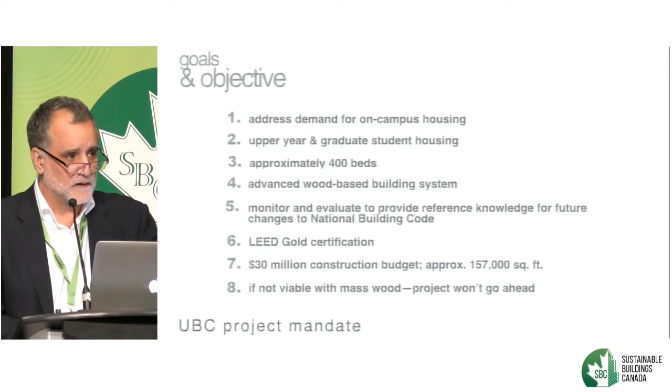And finally, it was stated that if it was not viable to build with mass wood, that would be okay, because that would just be a conclusion of a due process, and so then the project just wouldn't go ahead in wood. But the university had built 18-story concrete slab student residences. They've done 4 or 5 before Brock Commons, and so they would just build another one of those. So like I like to say, no pressure, no pressure at all.

This is an excerpt from an email back in August of 2014 when we were deciding whether we would even pursue the project. And even back then, before we'd even submitted our response to the EOI, our thinking was to develop an approach that would lessen problems rather than create them. Put a bunch of architects and engineers together, and invariably they make things much more complex than they really need to be.

We felt that a hybrid structure with concrete components was the way to go. We've just seen on projects around the world that they seem to be more favored by the approvals authorities. And even here you can see, even though we thought that some exposed wood might be nice, we recognized that schedule, cost, fire protection, and acoustical considerations would have to take precedence over the aesthetics.

This was underscored by this very, very tight construction budget we were given, which at the time worked out to only $191 per square foot. But on a quick study, we knew this was lowballed, just to drive down the fees. It wound up coming in at about $235 a square foot, versus a comparable concrete student residence which would have been, say, about $210. So $235, pretty impressive number. I've been at a few mass wood presentations, and no one ever talks about the cost, and that's because we're proud of the cost. Everyone else's costs that I hear behind the scenes, it's twice that or more.

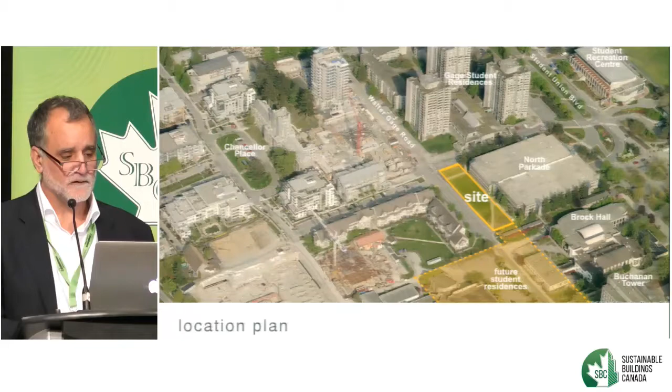So Brock Commons is located in the campus core district of the University of British Columbia. Even though it shows up as a green site, there was a bunch of temporary classroom portables that had to be removed. You can see they didn't give us much of a site, right beside a parkade. And when I say not much of a site, I mean physically it wasn't much of a site, in that the building didn't even fit on the site. We had to take over a bit of the roadway there. There used to be straight-in perpendicular parking across the street there.

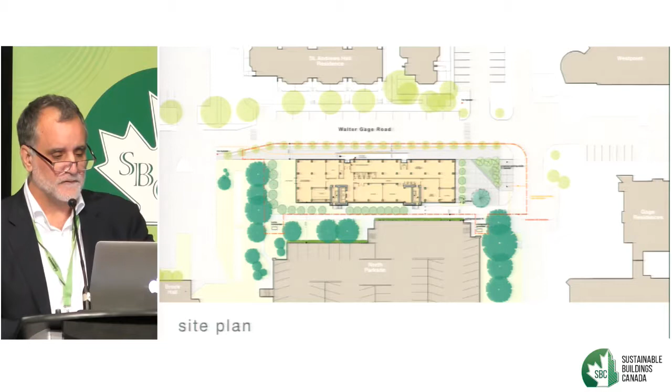We went through this study and analysis, and the client just couldn't think of why they really needed to go to the time and expense of constructing a basement.

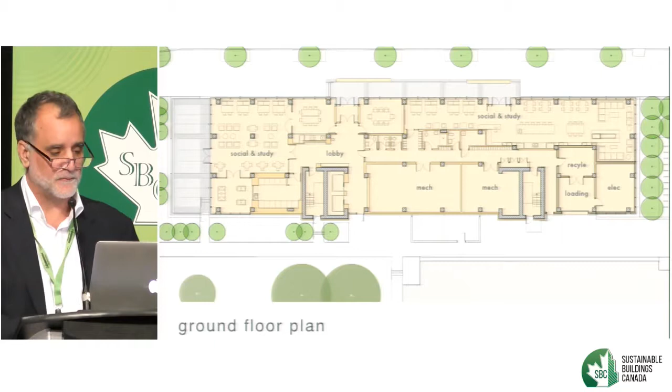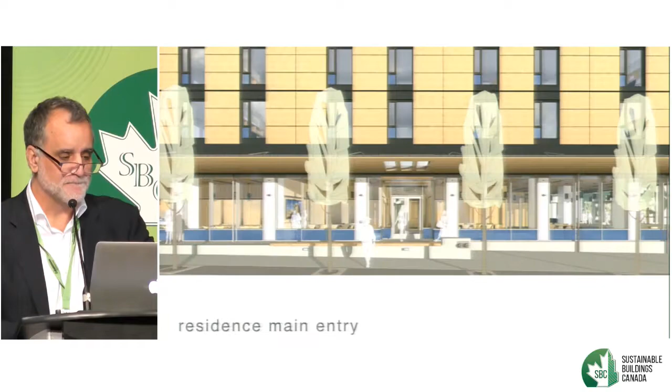So the form and massing features a rhythm of vertical striations with a CLT canopy at the base and a cornice crown up at the top. There's a view of the public realm and the main entry to the student residence.

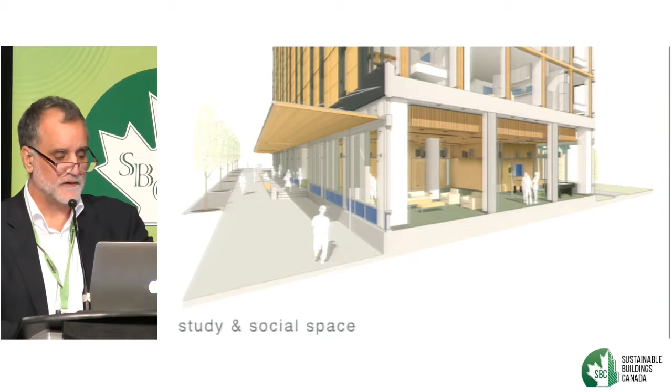This section shows an extensive 58-meter long CLT canopy that runs along the front of the building, and you're getting a view here into the social and amenity space for the students. There's a view into the quad units at each end of the floor plate.

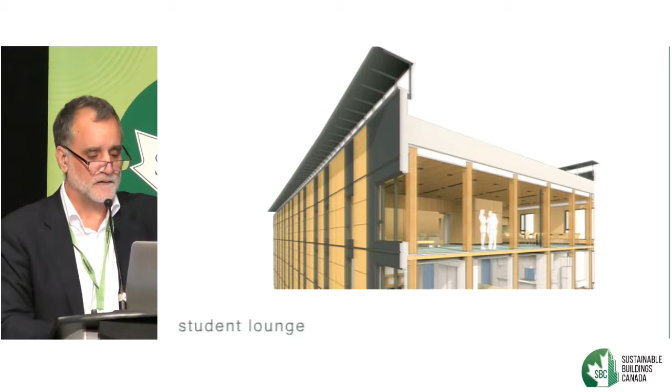And up at the top, we used one of these quad units on the 18th floor where, because the building code allows it, we exposed the structure there just for demonstration purposes.

On to some technical considerations, and again, just the overriding approach was to keep it simple.

In terms of the challenge, I have to say the most important challenge was securing an approval from the provincial authority to actually build the project.

This was the handout at the first meeting I attended with the provincial authority about the process they wanted us to go through to assure them that this project was meeting their standards, which required that we obtain a site-specific regulation from them. A site-specific regulation specifies what requirements in the building code wouldn't apply, and then it replaces them with substitute requirements. But rather than following this long and winding path envisioned by the authority, our approach was just to make the process as simple and direct as possible.

And I think we kind of surprised them on that. They're not used to that, I think.

But they did want to complicate things by requiring that we present the project to two expert panels comprised of a mere 20 experts on each panel—one expert panel for fire and the other for structure—and their role was to advise the authority whether the technical risks for the project were deemed acceptable.

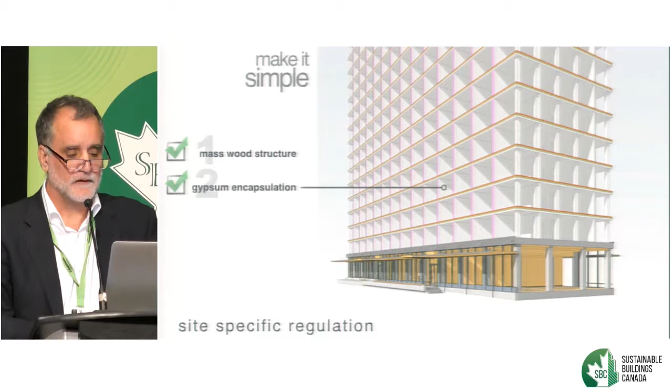And the third was use of an exposed CLT canopy, which actually we didn't have to ask—we just thought it would be nice to ask them because we were sprinklering it anyway, so it's permitted by code, but we thought they might be worried about it because of the wood up above.

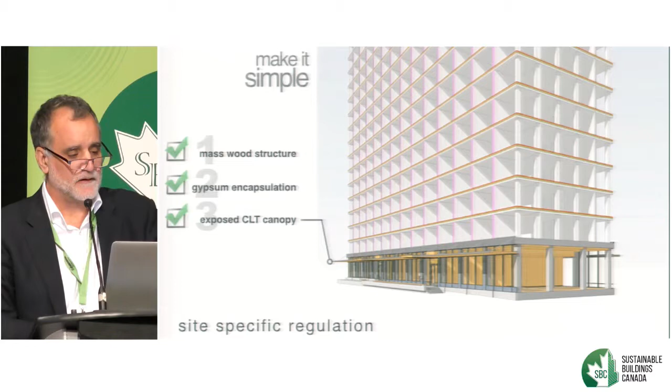So really the key thing here was that it was for reasons of cost, fire protection, and the approvals process. We had a very, very tight constraint on this: that the wood structure would be encapsulated with gypsum board completely to achieve that approval.

And the schedule did not permit time for any testing of new fire assemblies, so this is why we had to rely on known fire protection systems and the qualities of gypsum board. Even though we had a thicker than required CLT slab, for example, where we could have taken advantage of some char in our calculations, we didn't want to confuse the authority.

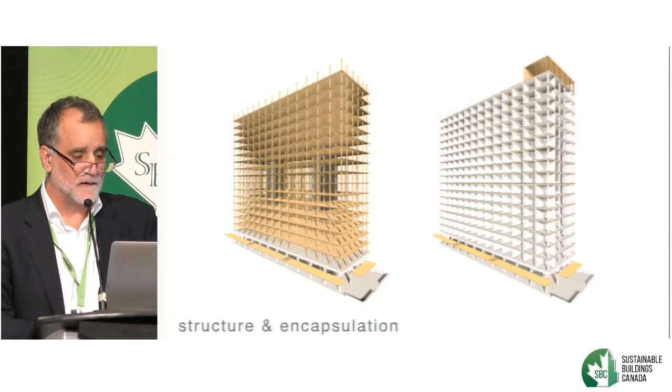This strategy was very successful, as the province issued the site-specific regulation just 3 months after our presentation to the expert advisory panel. They admitted that's certainly a record.

We used a hybrid structural system of concrete, wood, and steel. The first level and the two cores are concrete, above which are 17 floors of wood columns and CLT panels. Steel drag straps transfer seismic forces from the CLT to the concrete cores. The roof structure is steel, on the recommendation of the building envelope consultant. We had originally designed it in wood, but they advised the client on a belt and suspenders kind of insurance policy, reasoning that with steel there couldn't be any slow leaks. They said roofing membranes fail over time and you just don't know it, and they were concerned a wood roof would be susceptible to membrane leaks.

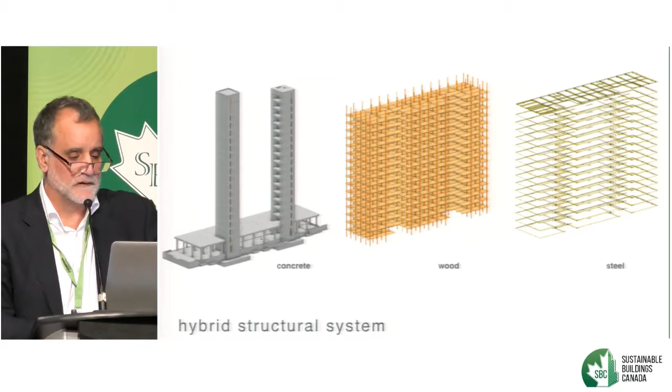The wood structure is made up of a variety of components. The panels measure 2.85 meters wide by 6, 8, 10, and 12 meters in length. We used parallel strand lumber columns at levels 2 through 4 at central locations, due to the higher structural capacity required. The typical glulams are 265 by 265 millimeters from levels 2 through 9, then reduce in size to 265 by 215.

A key feature of this mass wood structure is that no beams are required, due to the use of a two-way span CLT flat plate slab. This had never been done before, having only been used in really small applications on CLT projects, not for a complete floor plate. The beauty of having no beams is that you can distribute services very efficiently. If you have to go through or under beams, that's a big problem.

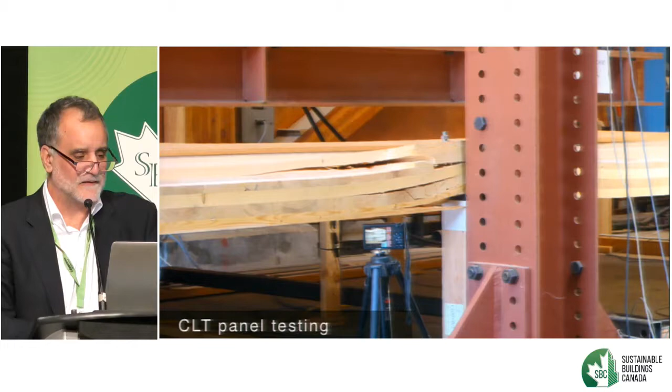This is the steel connector detail that got developed. It's really simple, practical, and economical. The connectors are epoxied onto the glulam columns, and holes in the CLT panels are guided onto 4 threaded steel rods. The upper connector is then slid into the base connector and fastened with just one steel pin. Then a steel cover plate is added, and the panels are bolted into place.

These manufacturing and erection tolerances are very, very tight, just plus or minus 2 millimeters for both the columns and the panels, and they need to be positioned within that same 2 millimeter tolerance. We did develop an all-wood solution for this, but it meant the columns needed to be a bit bigger to support the CLT with the shearing, and there were concerns about the ability to achieve the fire protection required. But we think there's a solution there for the future.

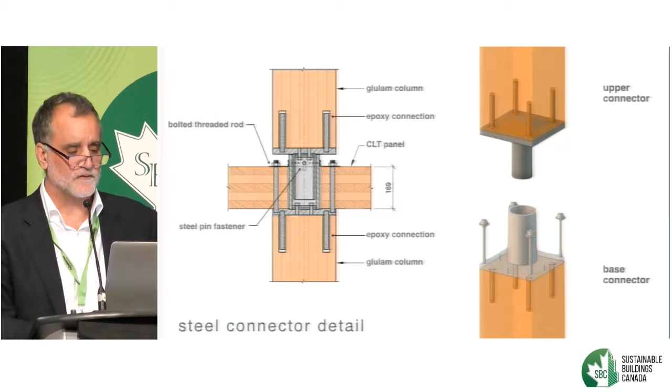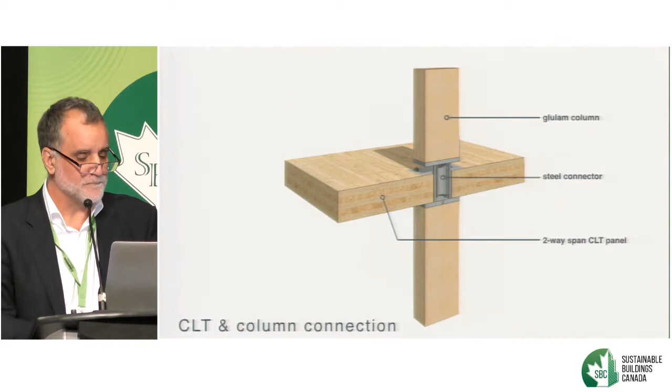Here's a view through the connection after it's assembled. Again, very, very simple. And this shows the final finished assembly after it's all been fitted out.

On to construction, again keeping it simple. Back in July 2015, a full-scale two-story proof of structural concept mock-up was constructed to test the various interfaces between the CLT slabs and the glulam columns, such as the wood-to-wood connections, and to obtain feedback from the installer on the erection process. The details were modified in response to that feedback.

So I said we didn't have to do testing of the assembly. However, we were required to test the fire stop penetrations through the CLT, because there just isn't a lot of information available on that.

So we carried out this test using copper pipe, cast iron, and PEX piping. The fire stop was required to provide 90 minutes of protection, but we ran this test for 2 hours and there was still full protection. We did it for 2 hours because we didn't have an official test, so we wanted to do this unofficial one. After 2 hours, the result was only a slight loss of gypsum board with 0 to 1/4 inch of char at the CLT.

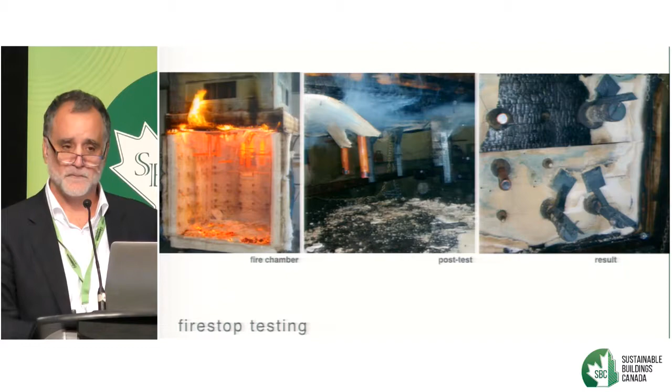Built into this was 29 extra millimeters of wood that we couldn't rely on for char. At the expert panel, the fire science consultant asked one of the guys at the NRC what he thought this assembly would test out at, and he thought 4 to 5 hours. So it's very, very redundant. It's all about getting the approval and getting this mass wood building built so there can be improvements on it in the future.

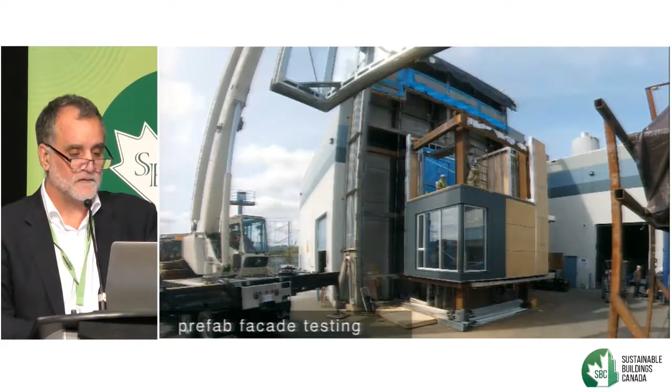We also did mock-ups of the prefab facade. Here you can see them being installed on a steel framework where testing for building movement tolerances and weather tightness was performed. Prefab facades in Vancouver don't really happen, so this was kind of a first again.

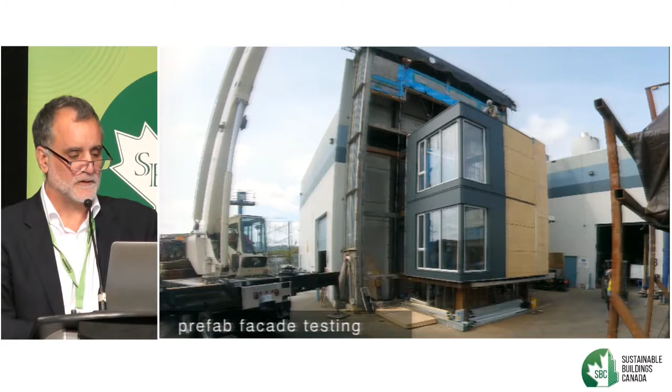Prefab panels required a lot of work with the prefab supplier when they were first testing this. It was taking them about 50 minutes per panel to install. They had to change their system and got it down to less than 10 minutes per panel, even faster once it's positioned in place.

The glulam columns and CLT panels were manufactured in BC by Structurelam.

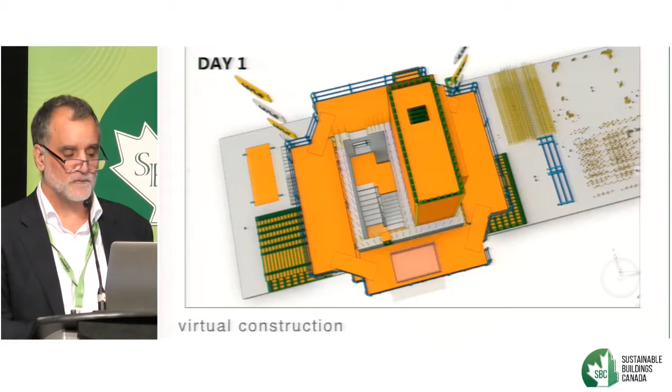Every component was assigned a specific location on the deck, and every step of the process was optimized for speed as well as safety. During construction, the videos were viewed on cell phones by the workers to ensure the proper process was followed. This video shows the optimal sequencing for the wood structure and the facade.

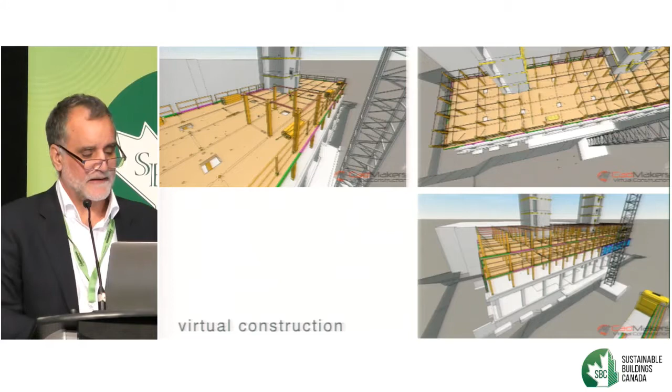The glulams are placed on the deck in bundles, and then the columns are braced. Additional CLT deck and glulam columns are erected, then the facade's craned and fastened into place, and this just repeats itself over and over and over again.

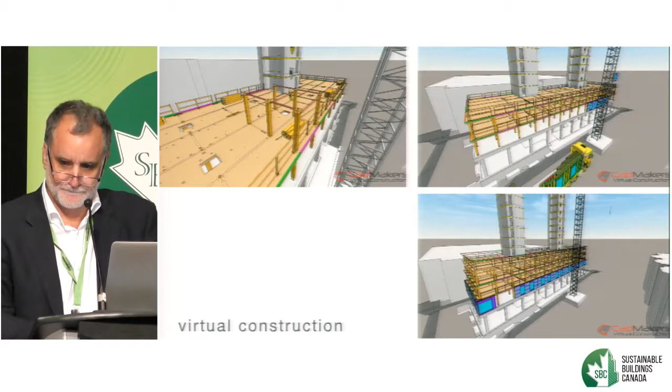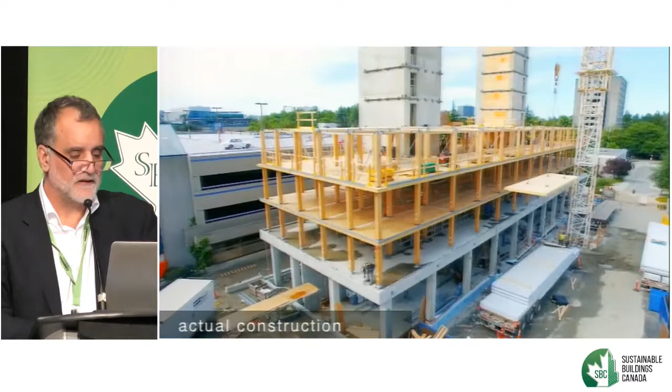And here's the virtual made real. It just takes 6 to 12 minutes to install each CLT panel, including the lifting and travel time by crane.

You see the site looks really quiet, and that's because it was quiet. There's only 9 workers needed to erect the mass wood structure, on a 9,200 square foot floor plate.

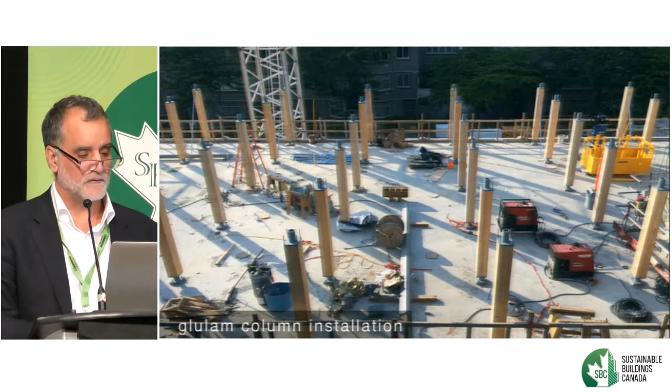Special care was taken with the first level of wood columns on the concrete transfer slab to ensure they were precisely installed within that 2 millimeter tolerance. You got to get it right, can't correct it afterwards. It's one of those first 12-meter CLT panels being raised into position.

Here you can see the high-strength Parallam columns that were centrally located on the lower floors.

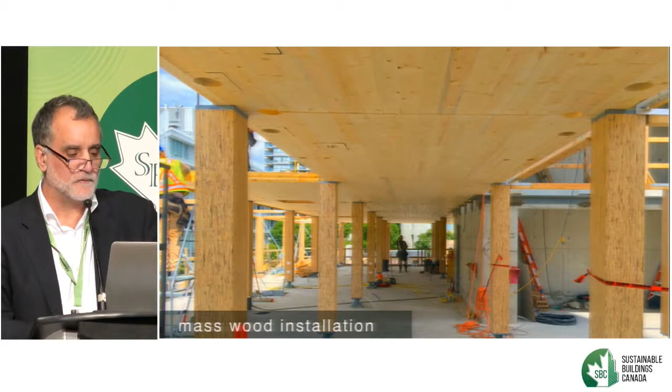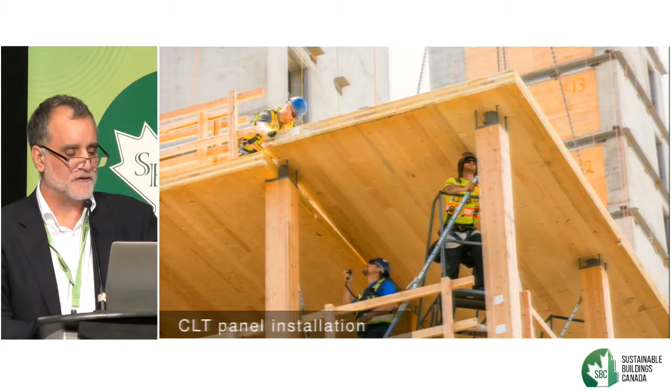Here the panels are being guided by the workers onto the threaded rods of the steel connector and also over the HSS piece of the connector. Up here you always got to have a sledgehammer handy during construction, just giving the panels a tap to ensure they're sitting tight on the steel connector below before they're bolted into place.

On the deck you can also see some plywood splines. They were used to join the CLT panels together through a combination of nails and screws.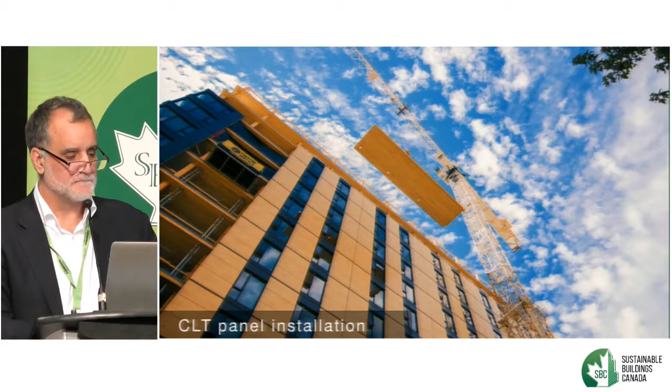Just a nice view of that sexy CLT panel being raised against this backdrop of prefab facade panels. And here are some CLT panels being installed on the 16th floor.

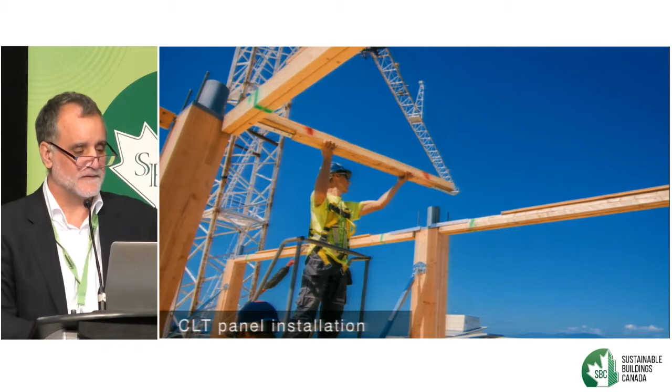The columns were temporarily braced to lock them precisely in position, to the exact plus or minus 2 millimeter design. You can see it's just a bit of aluminum angle fixed to a 2x4 to make sure it's in the correct tolerance. Before each panel is brought into place, those braces are systematically removed, and then the CLT panel is dropped, locking the system tight again.

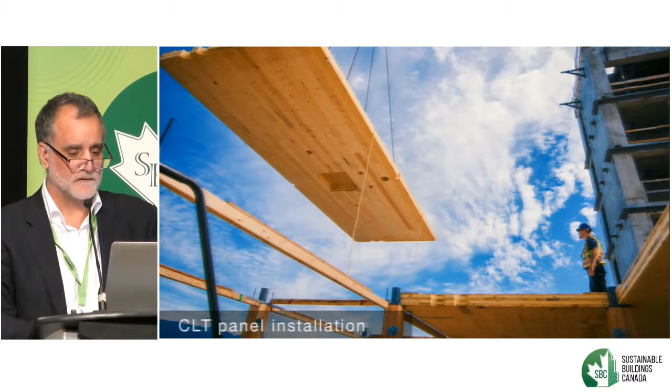Here you can see the guys getting it precisely located and dropped. Here, I like this one.

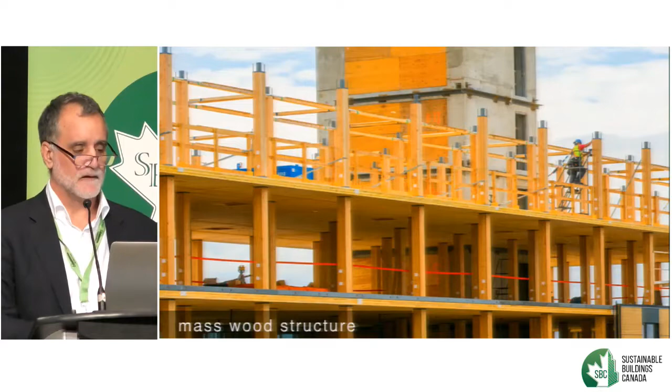And this is that completed connection. This just gives you a view of the repeating rhythm of the installation system.

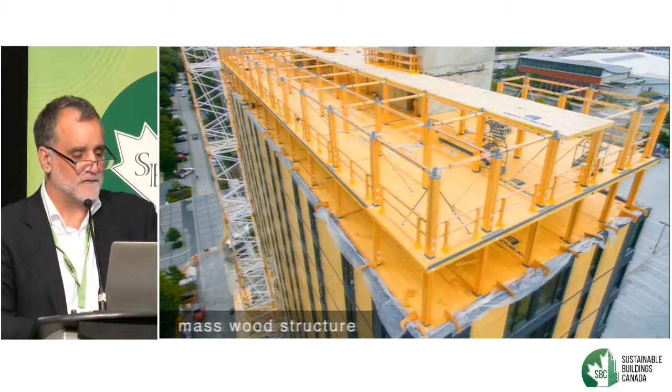Another view. This was installed at a rate of 2 levels per week, including the prefab facade. The team felt that they could do 3 floors per week - that's achievable for this size floor plate. You just have to work Saturdays, I think they said. Not unusual.

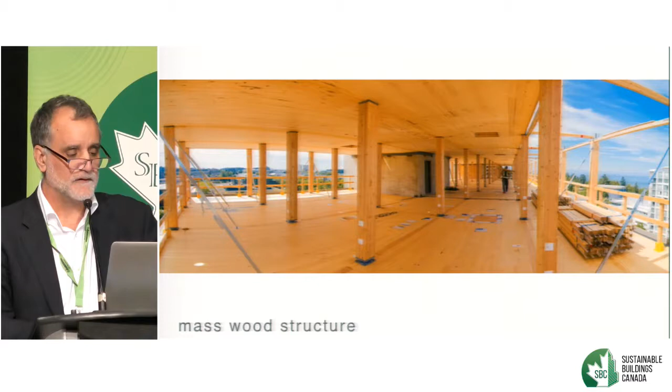Here's a panorama of one of the floors with the CLT panel installation in progress, and here's one that's finished. You can see how clean and clear this working level is. There's no waste or debris present, and that's because there's no waste or debris made. No one had to sweep this or clean it up - it's just what you see is what you get.

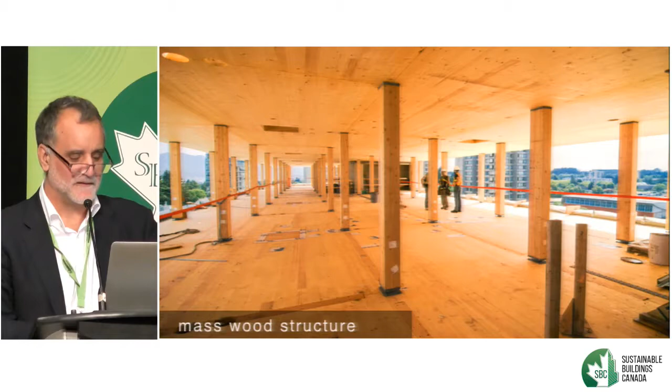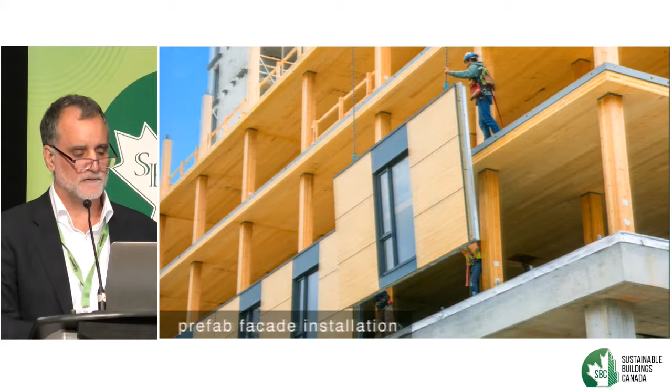A 6-man crew just takes 8 hours to install the prefab facade panels for each floor. You can see up top the steel angle, the panels hooked over that steel angle, and you see the little steel pins down below. It's just dropped onto the steel pins, and that's all it takes.

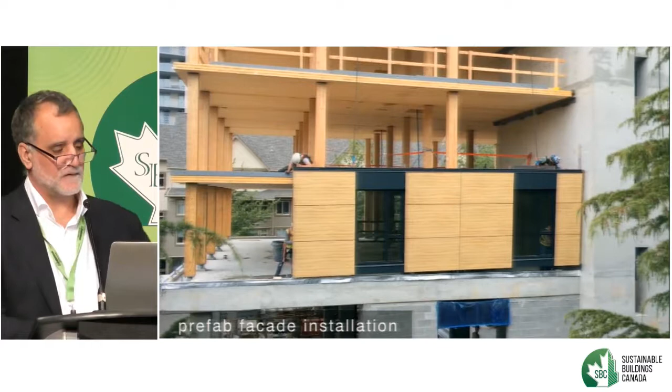Here's a video showing that process. I've cut out 6 minutes of walking that panel around the back of the building, but they're just aligning it over the steel pins, making sure it's hooked over the steel angle, and then dropping it into place, and then they can permanently fix it at their leisure.

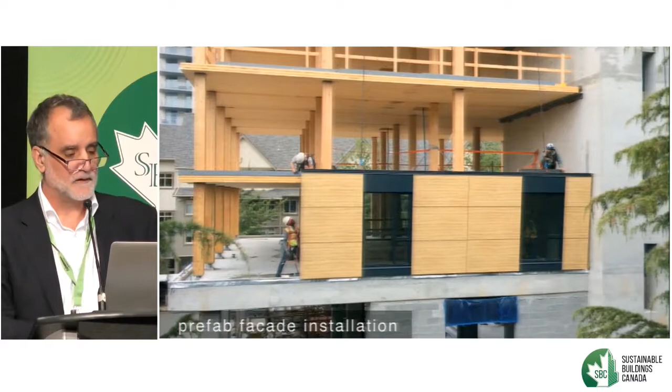This is an interior view. You can see the little square plates - that's what they're using at the base to hook onto the steel angle.

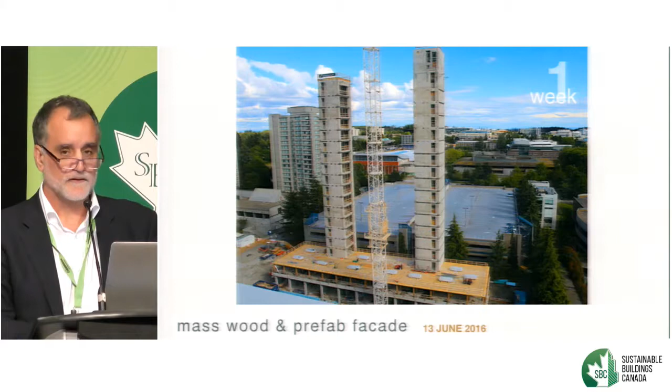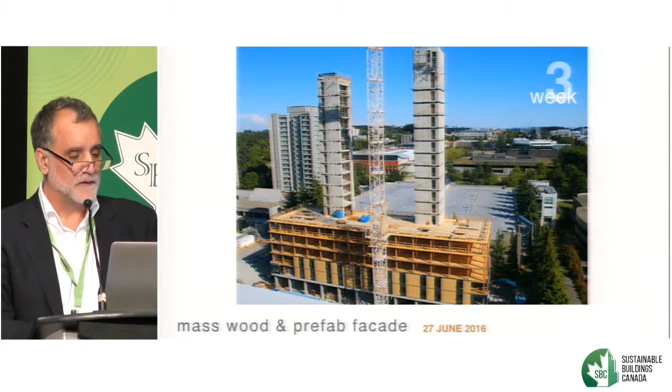So I found that showing the progress of this erection process in 1 week increments really emphasizes the speed of construction. During week 1, only 1 level was installed, as this time was taken to ensure everything was precisely positioned. At week 2, the pace had picked up to 2 levels per week. By week 3, we're up to level 7, and 2 stories of the facade were installed.

And here we are, end of week 4, we're up to level 8. I just like to say this is the equivalent of erecting a 6-story building in just 1 month. There's tons of 6-story buildings, and you could have that plus the facade in just 1 month.

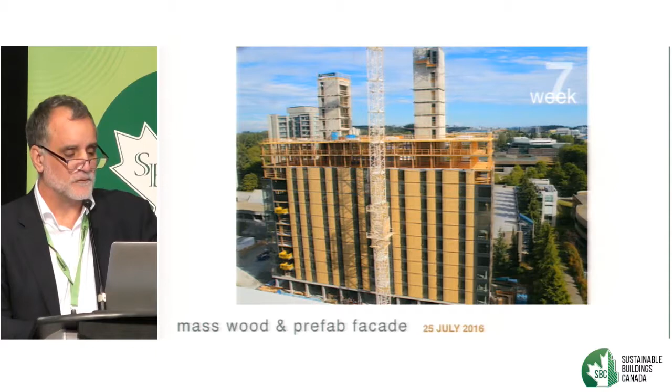By week 5, we're over the halfway point. Week 6, we're up to level 12, 14. At week 7, the end is in sight. Week 8, and then here we are, 18th level, week 9. That's 66 calendar days with only 46 mass wood installation days from start to finish.

And then the next day, the installation of the steel roof structure got underway. Ironically, the steel work went a bit slowly, and that was because they had a hard time meeting the high precision of the wood down below.

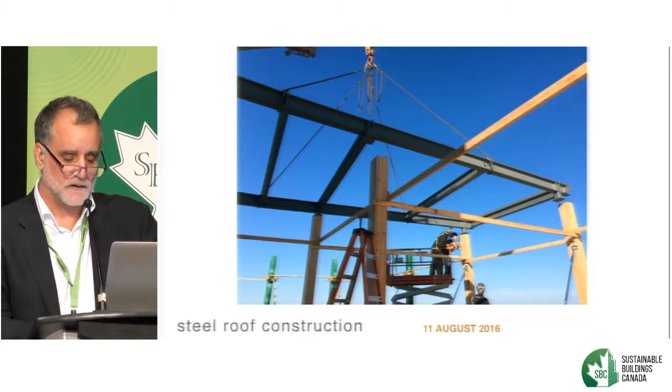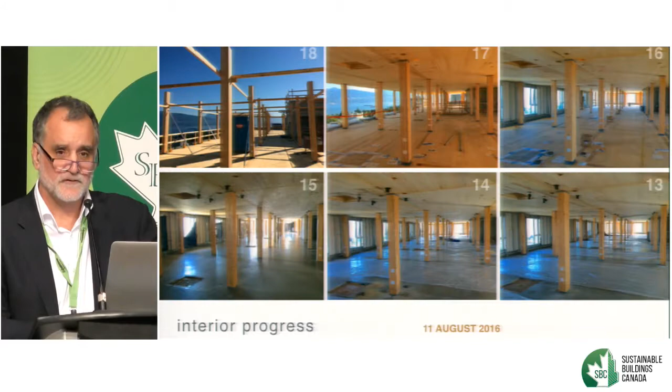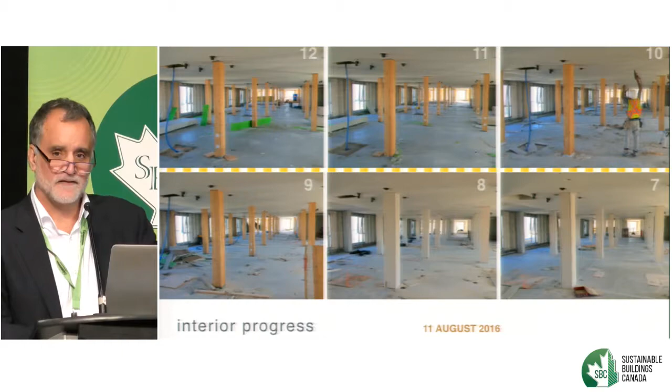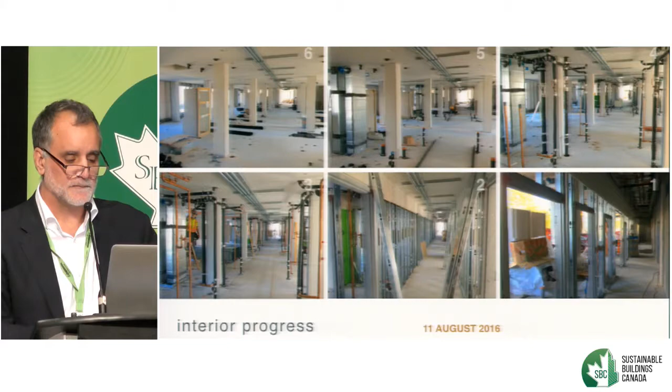But now back to the mass timber progress. Level 9 had the gypsum installed, and levels 8 and 7 had the columns encapsulated. Down at 6 and 5, the conduit and ductwork had begun, and levels 4 and 3, the plumbing was underway. Partitioning was underway at level 2. Down at level 1, at the concrete structure, partitioning was underway, and the main electrical and mechanical spaces were very much well underway.

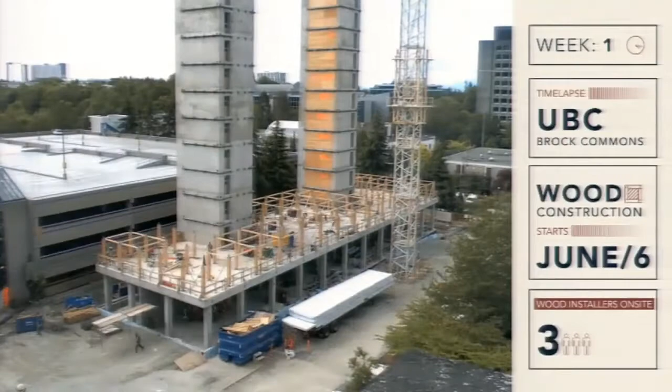So we're in week 1. As you can see, you just follow along with the data, just 3 workers, but pay attention to that ground plane. You can see we got like one bin there, and you'll just see things, just panels and prefab facades constantly get brought into the same space. Just very, very little waste in transportation on the site.

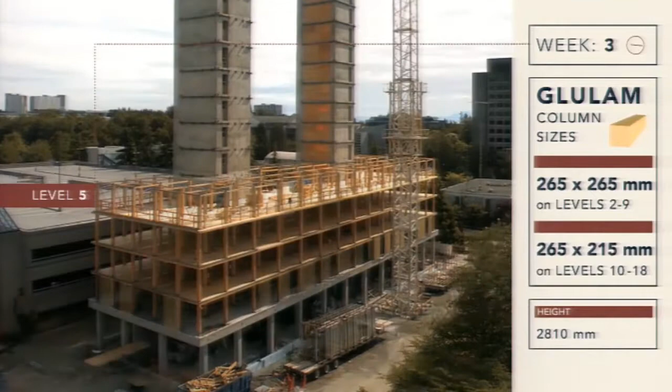Already at week 3, so I've mentioned the size of the columns there. But again, before the camera tilts up, enjoy that lack of intrusion on the site down below.

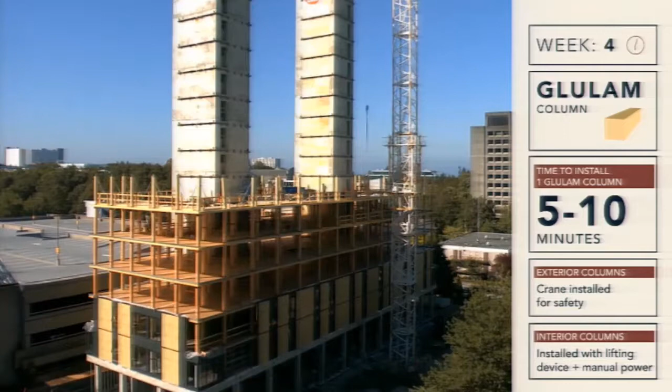Here we are at that one month point where you can see just how amazingly quick this progress is using a prefab system with such tight tolerances. You'll see every now and then, off to the left, a concrete pump truck sneaks in there to put the topping down. There it is, making a guest appearance.

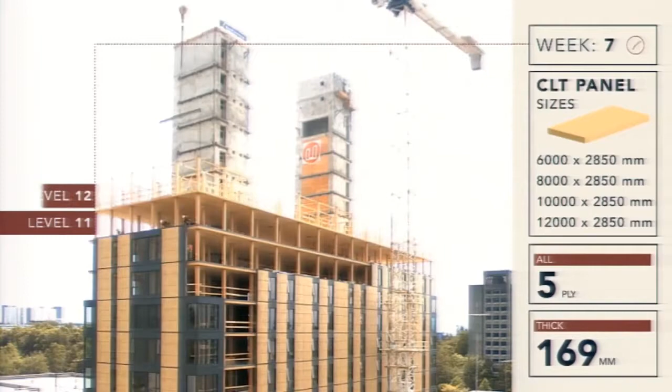29 CLT panels per floor. You can see they're 5-ply, 169 millimeters thick. As I said, in Europe, we were considering Austrian supply of the material.

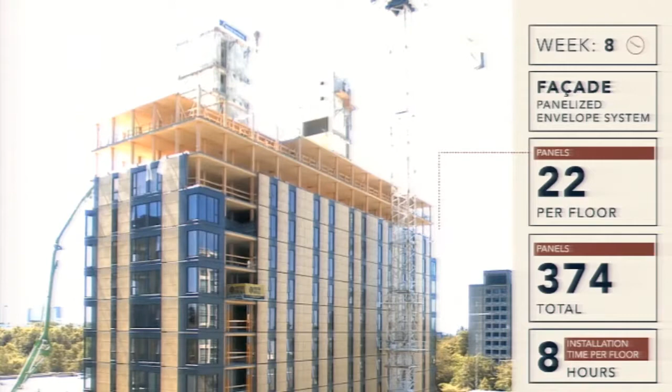They would have provided a 140 millimeter two-way slab system that would have performed the same structural task. The reason ours is thicker is because we get our lams from the 2x4 industry, and it costs money to reduce their size to slim down the panel. Structurlam told me that since then they found a supplier willing to provide them a thinner lam.

So of course the choice of construction products has a significant impact on the environment. I think that goes without saying. And here's a few facts and figures regarding the estimated environmental benefits due to mass timber.

I'm not going to read them, you can glance over them. But of particular note is the amount of carbon stored in the wood and the greenhouse gas emissions that have been avoided. In this case, with Brock Commons, we're realizing a total potential carbon benefit of over 2,400 metric tons of CO2. And here are what I like to call the stealthy sustainability benefits that are supplementary spin-offs to the use of mass timber structures.

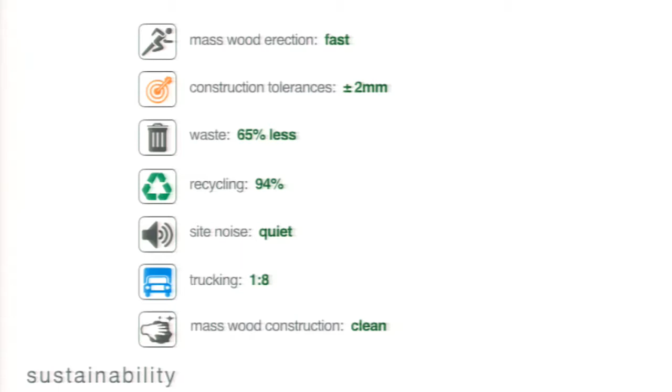I mean, in terms of the impact that developers and builders are going to enjoy just by using this system. And I got to say, this construction manager, whose only tall wood building this was—their business is building concrete high-rises.

While this system was going up, they just had smiles on their faces, and I'm not kidding, because it's the first time they've seen something different in the construction industry in decades. They were literally weeping about going back to concrete. They've seen the future, and they like it.

The only thing they're sad about is it's still going to take 3 more years in BC for the code to change so they can get more opportunities to build these buildings.

So again, looking at all of these benefits, they save money, they save time, they save energy for the builder and the developer, and that's why they're going to want to do it. We all know there's not a lot of motivation, unfortunately, for doing good to the earth.

But it's these stealthy sustainability benefits that I think will really lead to builders and developers wanting to use mass timber, just because it's fast, and it's fast because it's accurate with these tight tolerances. There's way less waste.

Recycling is at 94%, they were hitting that on site here, and it's just quiet. The neighbors are happy, and that's big in the development world. I got to say, it's huge in Vancouver. Nobody wants anything happening in their backyard, and if we can cut the time down in half and then enclose buildings and fit them out afterwards, that's going to be a big selling point.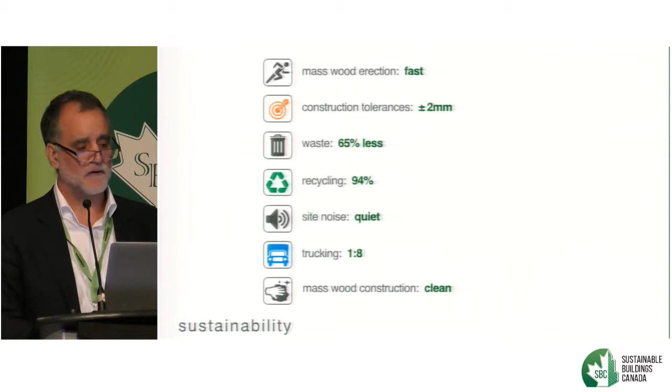You don't even have to sell it on that merit. You sell it on the merit of the constructability and the economics.

Back then we were on target with just barely 62 points, but it's recently been updated to 67, so we're comfortable there. As a point of interest and personal aggravation for me, the use of a mass wood structure earned us a single innovation credit, but that was offset because we're losing a point. Even though Structurlam has been supplying FSC wood since 2006, there was a paperwork snafu by the builder, so LEED takes it away because you can't prove that Structurlam didn't go and chop down some trees without following good sustainability practices. Thanks, LEED. I appreciate that.

In terms of ASHRAE, the project was required to meet ASHRAE 90.1 2010. These are just what the university assigned for the project. We actually used a prescriptive path compliance method, because we were well under 40% glazing, somewhere in the mid-30s. The UBC Sustainability Office set a building energy target of 135 kilowatt hours per meter squared per year, based upon similar buildings, these concrete student residences. So there was no focus on reducing that, because this was a fairly single-minded focus for this project: could we do it in mass wood?

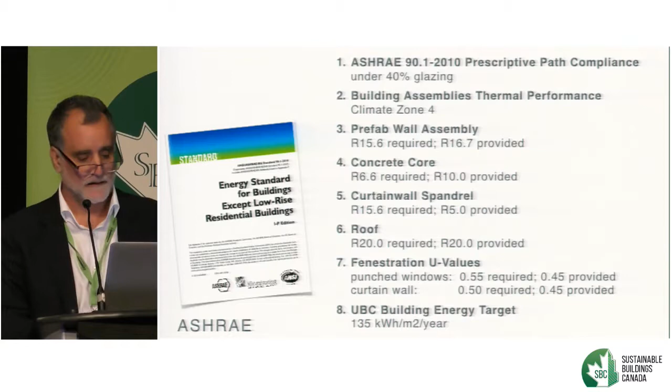The ground level spaces are heated and cooled with an air handling unit connected to the UBC district energy system, and the hot water is heated by the district energy system. But heating for the suites is provided by electric baseboard heaters, and they have an auto shut off when the windows are opened.

This is the makeup of the prefab assembly. It was steel stud framing. It was a competitive process, with a wood frame proponent and a concrete sandwich panel proponent. They were both more expensive than the steel stud framing one. Again, it's about the money. UBC looks at this as a development project, as well they should. That's why the challenge is here.

Then some exterior grade drywall with a liquid applied membrane, thermally broken supports, Cascadia clips, double glazed windows, just crummy double glazed aluminum frames. We couldn't afford the good fiberglass ones. Took a look at it, but didn't fit the budget. Mineral wool insulation, about 50 millimeters out there, and then these Trespa wood fiber laminate panels. Afterwards, we did insulate the cavity with batt insulation, applied a vapor barrier, and then type X drywall inside. The R value for this whole thing: 16.7.

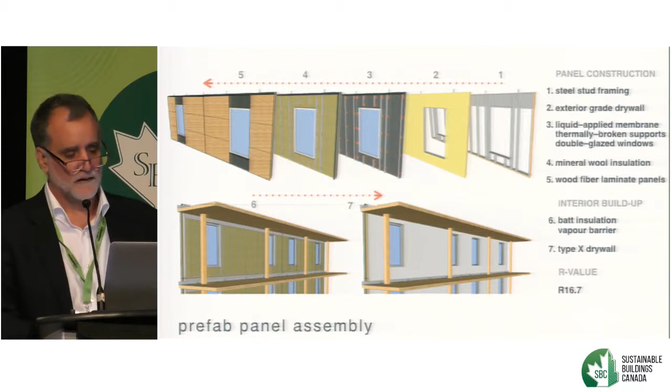We did a quick study about if we could get it up to Passive House. We could add 2 more inches of insulation, but the economic model didn't work. Energy is so cheap at UBC, and the way their operating costs or funding is provided by the government, they would have to rethink the system, and they just don't like to rethink the system.

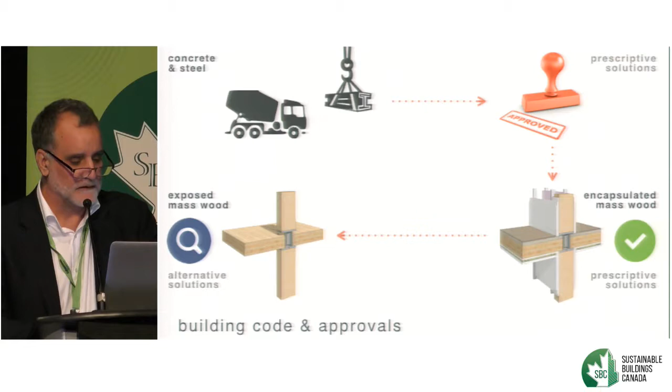Also, with respect to building codes, concrete and steel enjoy a whole host of prescriptive design and construction solutions because they're already embedded and recognized in the approvals process, and mass wood has a long way to go to catch up. But interestingly, through our work with Brock Commons, the BC authorities have told me that they're developing 2 paths for approvals of mass wood structures in the future. The first is going to be kind of a straightforward, prescriptive, tested solution, ULC for encapsulated mass wood. Origine did a test of their system with 1 layer of gypsum board, and they got a 2-hour rating. We had 3, just to handle the politics to get the project approved. So we were always confident there's going to be improvements for this.

As I wrap things up, I want to return to Hermann Kaufmann's tall wood philosophy and emphasize that tall wood isn't about promoting this vision, it's really about fueling this evolution. The main objective is to continue taking these precise and consistent steps to nurture the development of mass wood as it grows and matures. If you propose anything greater than that, too many heads will explode. You need to crawl before you walk, and you got to walk before you run.

Unfortunately, many of the mass wood projects I see being promoted around the world seem to be more about sensationalism than about substance. Imagine just say...

18 stories and below, if in our cities those were all mass wood structures, that's a hell of a contribution to the carbon sequestering issue. If we got a third of buildings in cities built with mass wood, that'd be really incredible. In terms of sensationalism, do we really need another Empire State Building, but built out of wood this time? No, we need these mid-rises and lower. That's where the quantity and the volume is.

So let's not lose sight that the development and growth of mass wood has a long way to go. But I think it's going to be these simple, straightforward, extraordinarily ordinary mass wood buildings that will be the foundation upon which mass wood makes a genuine and meaningful contribution to the future sustainability of our cities.

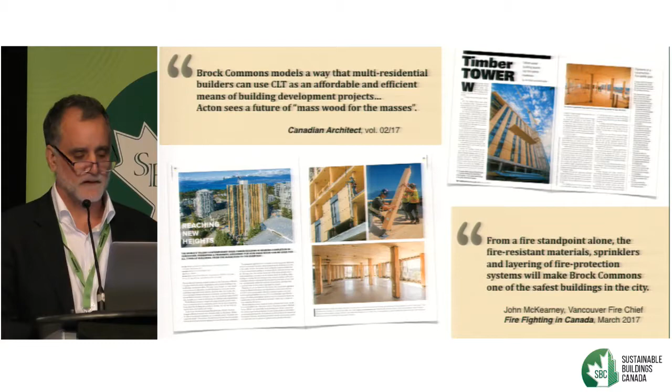So in conclusion from Brock Commons, we've learned a lot, but what we've really learned is that mass wood is fast. It's fast and accurate. As I said, it took only 66 days to erect and enclose 17 stories of wood structure.

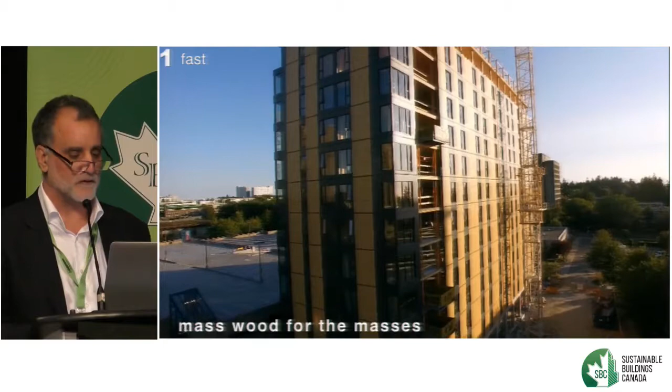Mass wood is clean. There's virtually no waste produced during its erection on site. And mass wood is quiet, man, I can't tell you how big this is. The only sound of note is that of a crane and screw guns. There's just no jackhammering or coring activities taking place, no metal shoring being dismantled and rattled about. The truck traffic is significantly less noisy there.

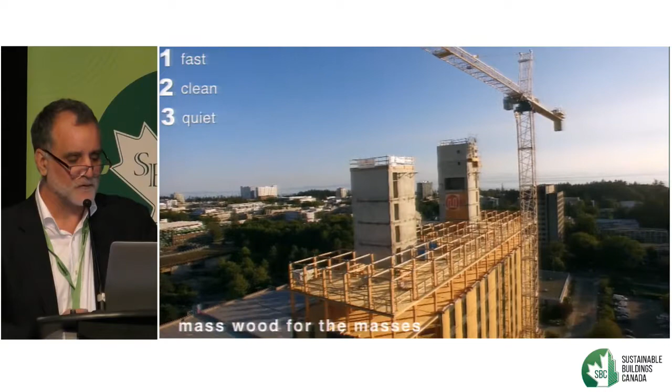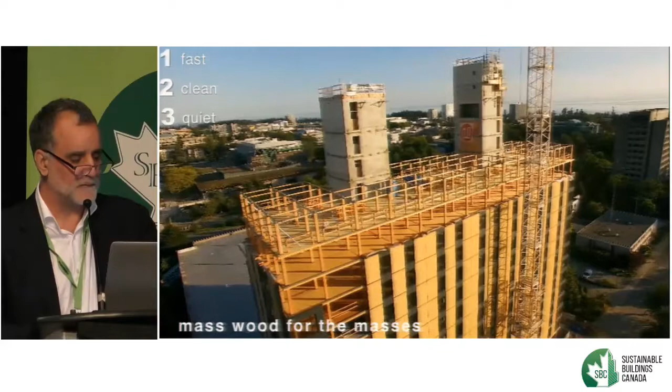And the majority of construction activity to finish off the project is contained within the building envelope, again muffling the noise and disruption in the neighborhood. And of course, mass wood's sustainable. Canadian and U.S. forests replenished the wood used at Brock Commons in just 6 minutes. And the project realized a carbon benefit of over 2,400 metric tons of greenhouse gas emissions avoided.

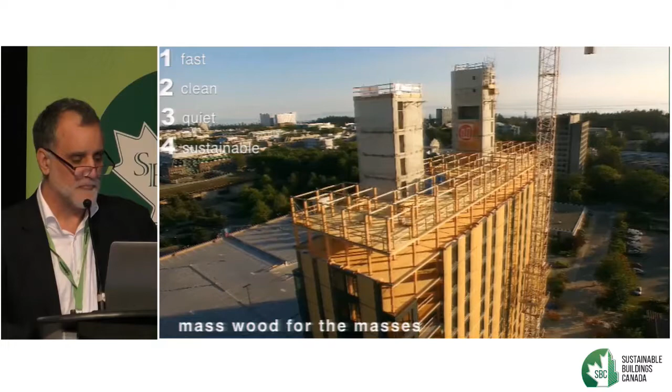And mass wood, well, it is economical and it's going to be more economical. As I said, this preliminary cost comparison indicates that the construction cost is within about 8 to 9% of a comparable concrete building. We've got all of these first-time costs, but price parity is within reach.

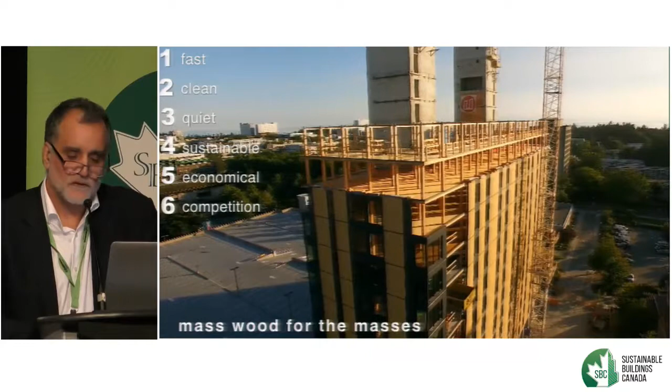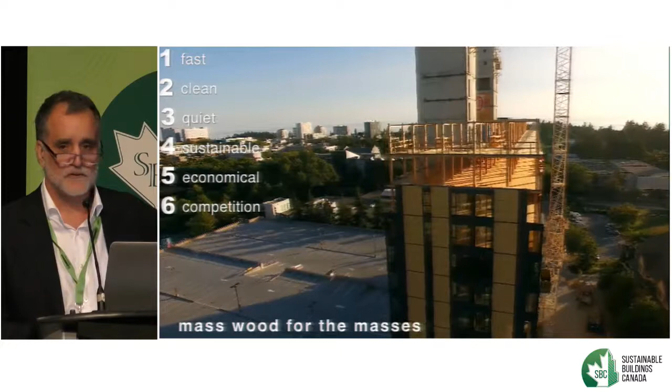But to get there, mass wood needs competition. The market needs more mass wood suppliers and related product support industries. I was showing all these products that they have available to them in Europe. We just don't have any of that here. Well, we do, we just got to pay for all of that shipping and for those nice, sexy, expensive systems.

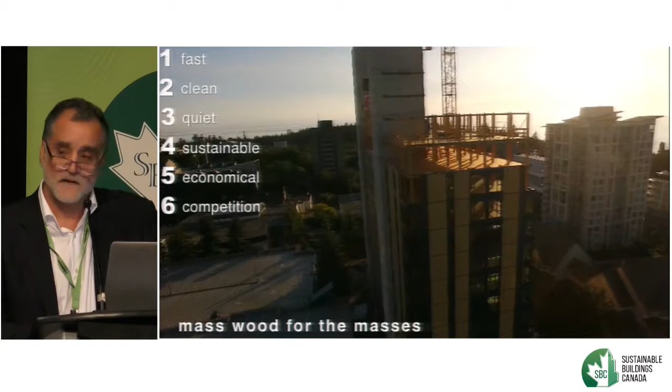But having the United States entering the mass wood market should prove to be extremely significant in the future, when they figure out that there's money to be made there and the benefits for construction. And then finally, mass wood needs approvals. The building codes need to include mass wood for high-rise applications.

And really, there's absolutely no doubt in my mind that in a not too distant future, our cities will feature extraordinarily ordinary mass wood for the masses, and that's simply because mass wood buildings make sense. Thank you.

A couple of questions between Russell and a glass of wine. Anybody got them?